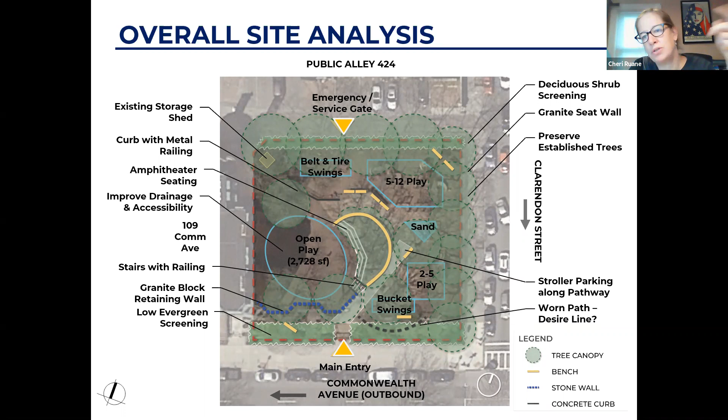So some of the things that we heard: certainly there's a desire to have the service gate and emergency access along the alley be shifted. Also understanding that the flavor of the playground is beloved, and we totally get that. And I also recognize that some folks are thinking, well, do we even need to update the play equipment?

Well, the play equipment is old, not older than me, but old. Once it gets past 15 to 20 years, it really does stop complying with current safety regulations. Maintenance becomes a concern. It's time.

As we look at open separated play at the lower level, and recognizing that folks want a large area for free play, that's awesome. A community bulletin board, modifying the fence, making sure safety requirements are being met, and then really focusing on natural elements, ground level discovery areas, tactile play, things like that.

I think another piece that is important is understanding that we're trying to create a site that really is able to serve a bunch of different ages. And that becomes especially important in the various parts and pieces that go into the redesign. Also recognizing that this small footprint does a lot for a lot of different people, so it has to be a multitasker as it continues to evolve.

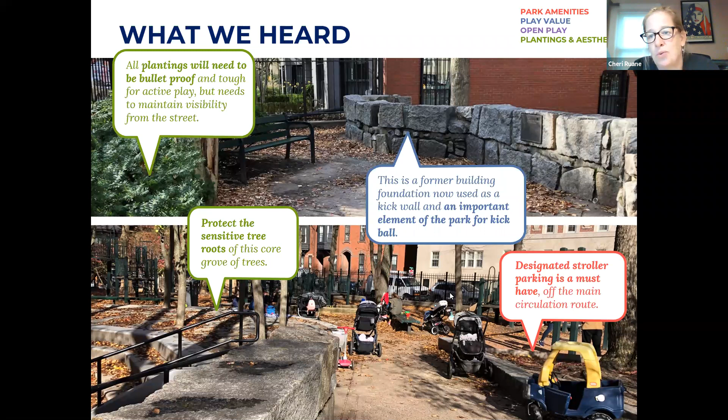Some cool stuff: the former building foundation that is now in the site there, the arrow in the center—it's an important element in the park, obviously, for the raucous games of kickball. Also knowing that this is a tight urban site and that plantings really need to be maximum strength so that they can withstand the use and all the urban conditions that go along with it. The tree roots we're being super careful of as we look to renovate, and recognizing that stroller parking really does need to have its own place so that it doesn't block circulation.

The fixed play surfacing, a lot of what you see is remnants of making the site accessible and compliant, but also recognizing that the Fibar mulch wears away at the bottom of the slide really quickly. So these are remnants of ongoing operation and maintenance. I feel like this renovation, one of the big goals is to really integrate all of that operation and maintenance into the design so that we're not getting these makeshift solutions.

Again, the tree canopy, the open play. There's the learning projects etched stones, which we are mindful of, knowing that drainage is important everywhere, and that as an urban park, it is one of the few places that actually has pervious surfacing. So we want to be smart about how we manage stormwater, and make sure the site is really inclusive, not just for physical inclusivity, but also developmental inclusivity. So tactile play, imaginary play, gross motor, fine motor - those are things we think about all the time and want to reiterate that they're being included.

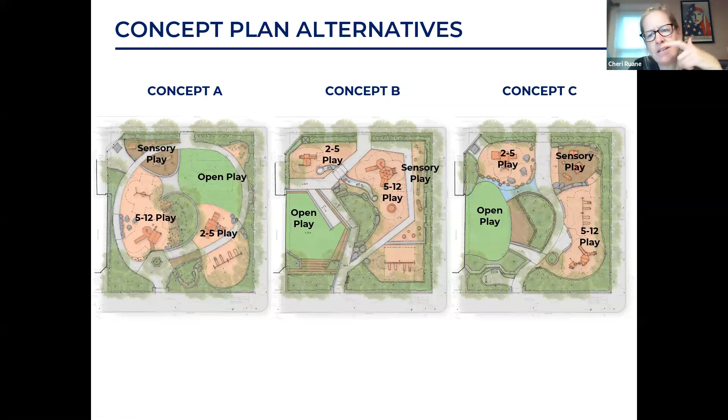And I think, Cassie, are you next? Are you the next slide? Yeah, okay, I am. Great.

Thanks, Cheri. Yep, so I think this has been such a great collaborative process. Like Cheri and Nate mentioned, we've gotten really informative experience from people who have been there every day and experience it, and are some of the original people who have seen how this park has changed over time. So we're really grateful for all of the feedback, and we continue to be impressed by everybody's investment in this process. There's a few slides here where we've tried to consolidate and synthesize some of the main tenets that we've heard and want to push forward through the preferred plan.

The first is really about incorporating synthetic turf into the open play area that'll look and feel like real grass, but makes for a much more sustainable play surfacing in this dense area of the city. We'll also be looking to install poured-in-place rubber surfacing in a majority of the rest of the playground. Anything we install will have a really natural color scheme so it fits with the feel and aesthetic of the neighborhood.

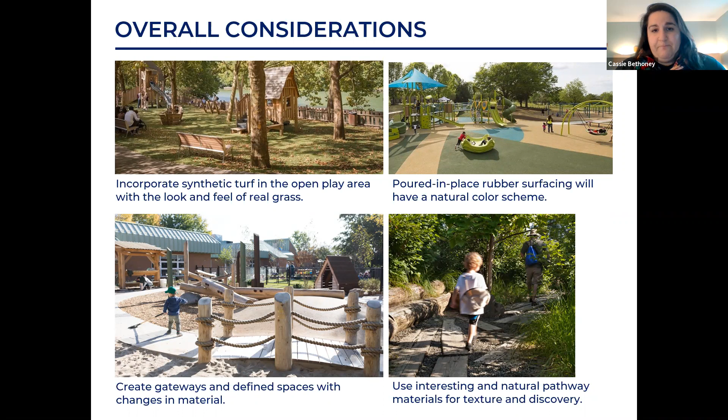We'll also use natural materials to build play into the elevational changes of the playground. One of the great things the original designers and advocates for this park did was maintain that foundational wall and make use of the elevation that the former building provided. So we'd like to continue to play into that and use things like embankment slides, ropes and posts where we can take advantage of that elevation.

And then we'd also like to create play value with natural materials. Not everything needs to be a manufactured play structure - we can use logs and boulders and things to make play out of natural materials.

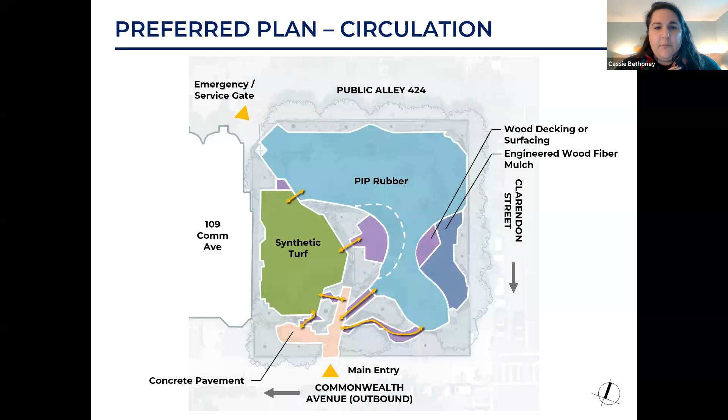And then we have several areas that are informal — either logs or steppers or granite boulders — that would form edges around the playground and define the space of the playground, but also be seating opportunities for parents, caregivers, or teachers who would be overseeing their kids playing around.

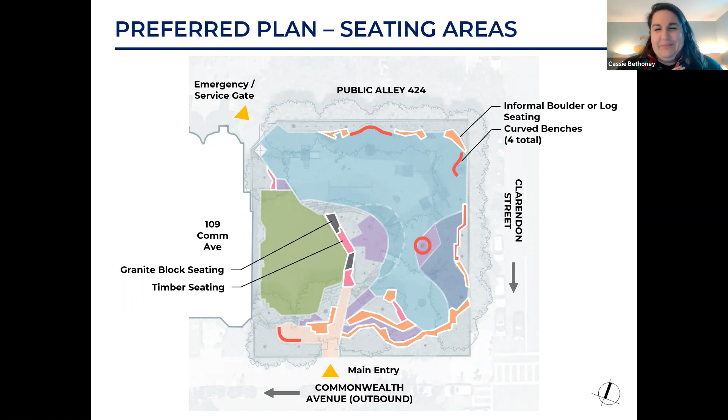For all of these larger play structures, it's really a mix and match scenario with manufacturers. We tell them what are the elements that we really have to have on these play structures, and we can fit them to make whatever kind of shape we want.

So whatever you see—one thing we'd love to hear, and we've heard a bit from the working group, is what are the elements we definitely need to include. One of those was monkey bars, so we know that's something that needs to be in the 5 to 12-year-old play structure. We'd also include a 2-bay swing, with 2 belts and 2 buckets for the littlest kids and little older kids.

And then we'd include a spinner, which you'll see in a moment, but it's an element we don't currently have in the playground. And then for the edge, one of the design elements we thought would be really beneficial is trying to break up that rectangular edge of the playground.

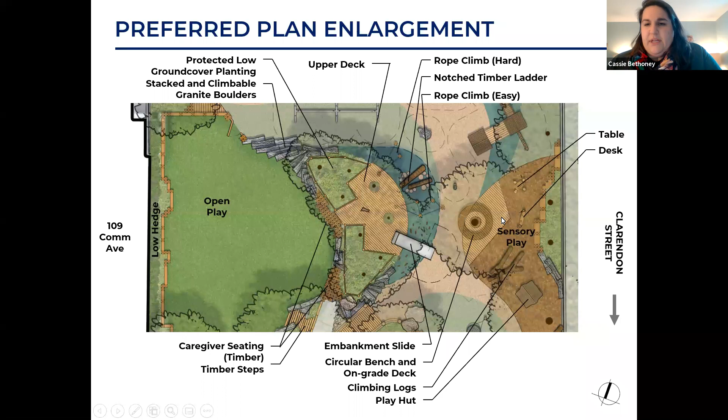In terms of sensory play, we'd like to include tables and chairs, a desk where kids can pick up buckets of mulch and play with them, fallen logs, and a play hut. We'll also have a circular bench here with a deck as well as a meeting center spot.

In the lower, more front part of the playground, here is where the main entry to the playground will be. We'll still keep a little portico here with seating, but we wanted to create spaces where you could get down into the open play and make that connection from upper to lower level. It's about 3 feet of change.

While we'd still want to maintain the wall here, we think we can build in some of those learning experience stones to create a little stepped pathway down into that space. I think this is a great place to also protect the trees that are here by using wood edging and so forth, which helps create a strong edge between planting and wall and open play.

We'd also like to create a little discovery trail along the front edge. It's already a desire line, so this would create a secret spot that's still visible from the street, but is a little secret zone you can get to and play in a different way. We're imagining a textured floor of timbers set in the ground, with edges of logs and boulders. This area would also include a basket swing and a bridge, as well as the more formal gateway into the playground.

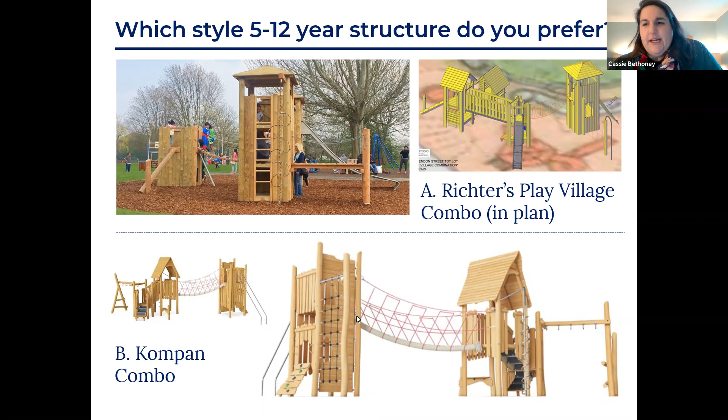So we just have one more poll, and that's on the 5 to 12 year old play structure. The top image on the left side is the Richter play village combo. The yellowy images are just models—they wouldn't look like that, they'd look more like the top precedent image. But that is what is in our plan currently. The other option is the Kompan version, which has more of a fairy tale feeling to it.

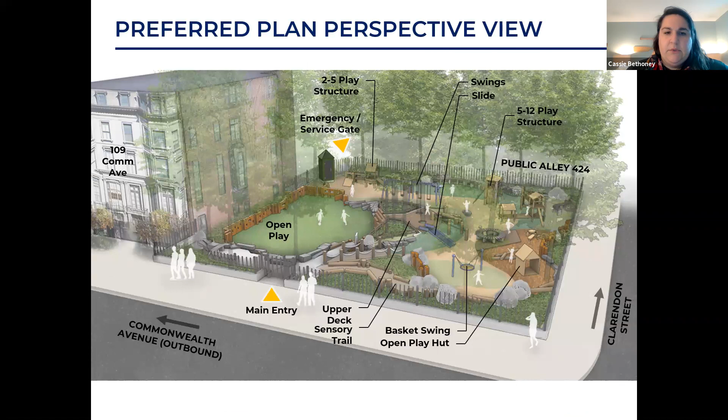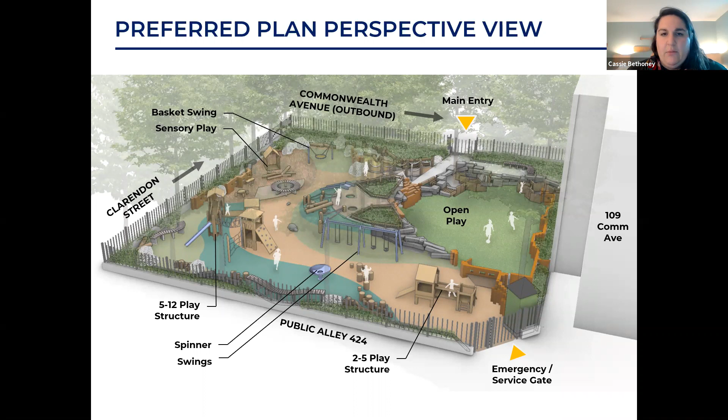Sure, yeah. We were thinking - I can skip to the bigger view, it's better in this view maybe. Actually, maybe a little hard with the trees, but we're imagining that we keep that wall intact, but we add to it or expand areas where we're building out the wall, so it's less structured in some parts, but it still retains that kick wall element. It might be better to see in this enlargement. Is it kind of like for climbing? Is that the intent, to get up and down from the seating area?

The learning experience stones, we were thinking if we do end up doing the decking, then we would pick those up and save them. One option would be to incorporate them onto steps that bring you up into this level. These brown lines and gray area indicate that surface would become learning stones, like a mixture of flat stones.

We were also thinking about a community kiosk in this corner, just to note that. And we were thinking about how to protect the trees that are really exposed right now in the open play area, making use of wood timbers to build up that wall a little bit. It might create a better kicking surface that's more attractive than kicking in this direction towards 109.

Does that answer that question? Yeah, that's okay, thank you. I just wasn't sure how that was all going to work.

I had a question about the wood structure you were proposing along 109. Can you give me an idea of how high you're proposing for that? We definitely would not go higher than the lowest window, so as not to impact those views.

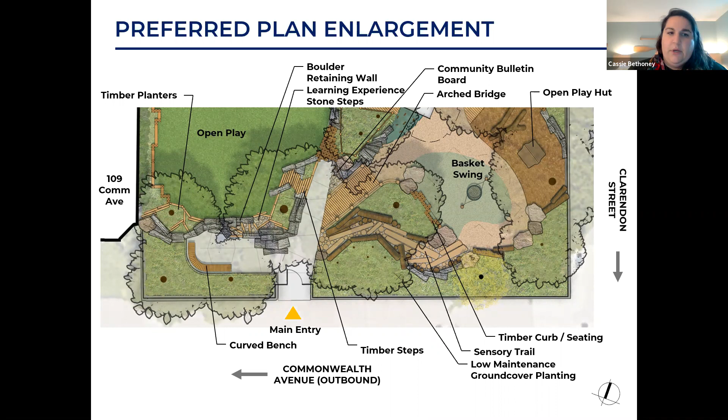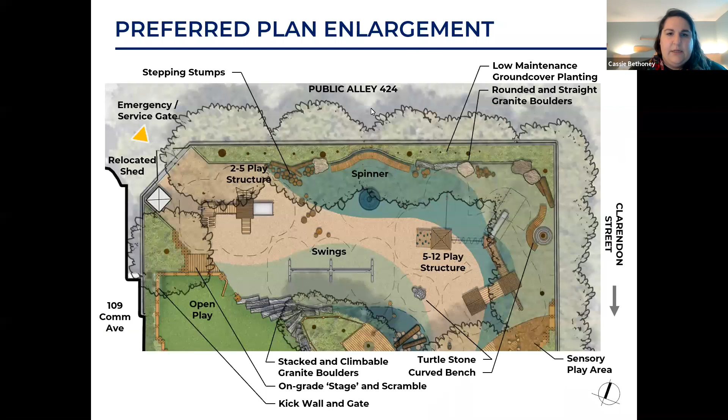I'm imagining it's like an 18-inch high wall that can also be a seat wall. Then we would plant on top of that whatever mix of materials we ultimately end up with. Our initial idea was to do a hedgerow along that edge, but we're hearing other thoughts on that. We're imagining it similar to that precedent image shown at the top of the preferred plan.

When you say plant on top of that, you don't mean on top of it, you mean in addition to it, behind it? Yeah, in addition to it and behind it, just wanted to be clear. Yeah, so we're thinking of it looking something like this, maybe solid in that case, and then there would be planting behind it.

And then you asked about the water connection. So we can certainly add in a hose bib connection, likely by the storage shed.

I just want to confirm, Sue, that was what you were referencing, not an actual drinking fountain? Correct, yeah. Just a way that maybe it could be incorporated into the shed so that not everybody can get at it automatically, but it would be there if we wanted to use it for a special event or something.

Although I think the teachers want water. The kids could just turn it on whenever, right?

Sue, I see your hand up. Yeah, thank you.

I really appreciate all the thought that's going into this. It's a very challenging thing to get everybody in the same space and have it all function. And I don't envy you, Cassie, at all, trying to sort all this stuff out. But a couple of comments.

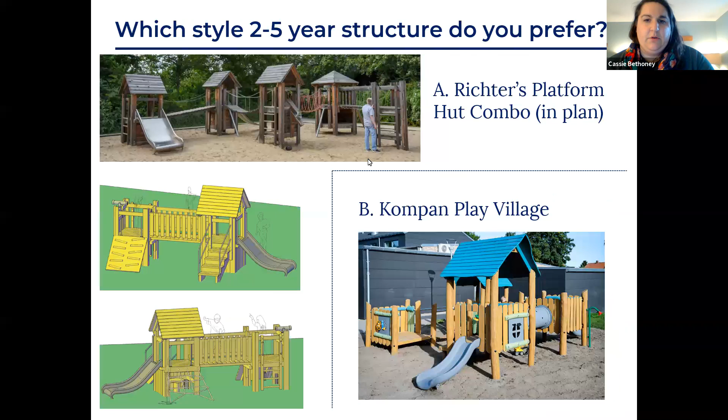Okay, I like it. I thought that was a funnel for some reason, so that makes sense. Yep, and then there'll be more of the sensory logs and the stumps in the hut. Got it, that sounds good.

We had spent a good amount of time looking at the differences. I know it's been a big debate in our school between the Richter and the Kompan. I'm wondering if Cassie and Nathan have a preference, or what you've seen in terms of what has been successful at other parks, or if you had to choose, what would your preference be? I do appreciate that we could go in - I've seen some of the massive order forms where you could pretty much order anything under the sun in terms of accessories. But do you have a preference either way?

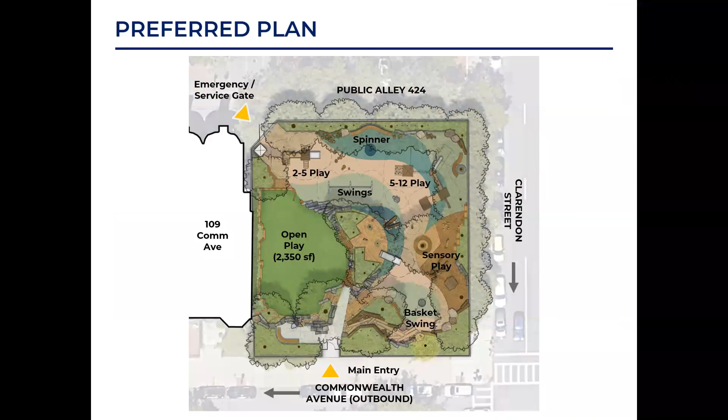All right, Cassie, do you want to go back to the plan? All right, so just looking at this, it sounds like we're going to continue to incorporate the feedback.

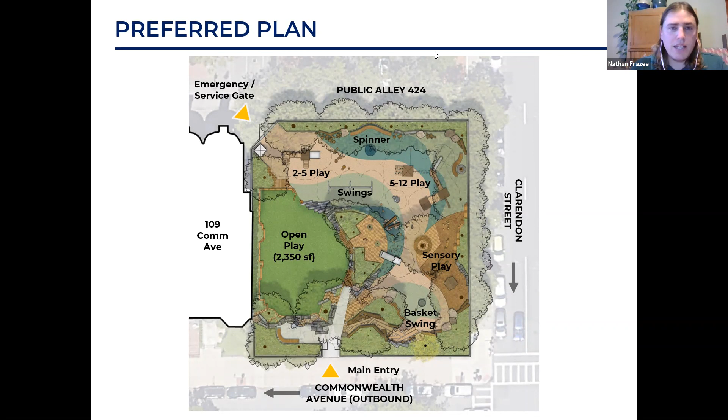Going back to the earlier slide in terms of a timeline, Cassie and her team, Cassie and Sherry, are going to work to continue developing this plan, incorporating some of the feedback we got tonight. What we'll be looking to do is go out to bid this coming winter, so we can try to have the least disruption to the school year for the schools that use this park. So that's our schedule as it stands right now.

Without seeing any other questions coming up, I think we can maybe close a little bit early and enjoy the fact that it's still sunny out — well, sort of sunny, a beautiful day.